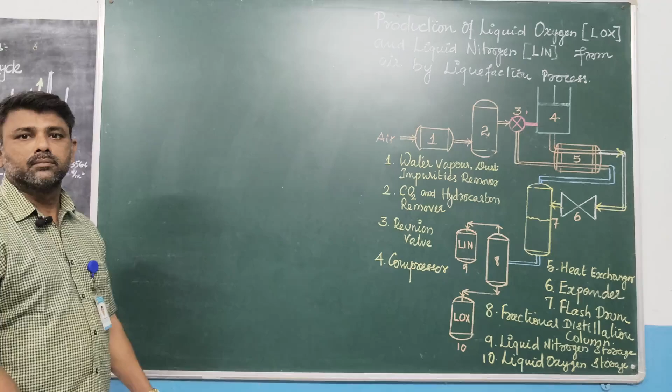Students, good morning. Today I am going to discuss about the definition, principles and application of liquefaction process.

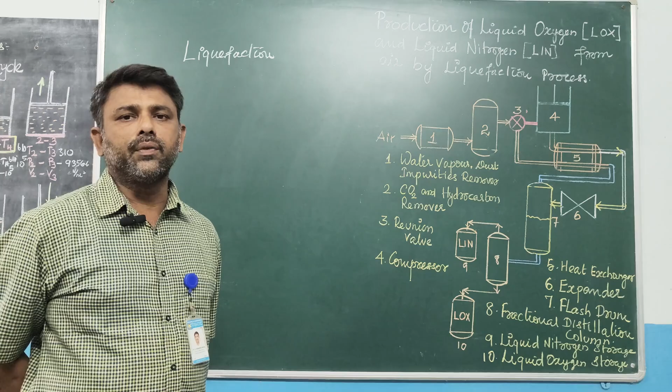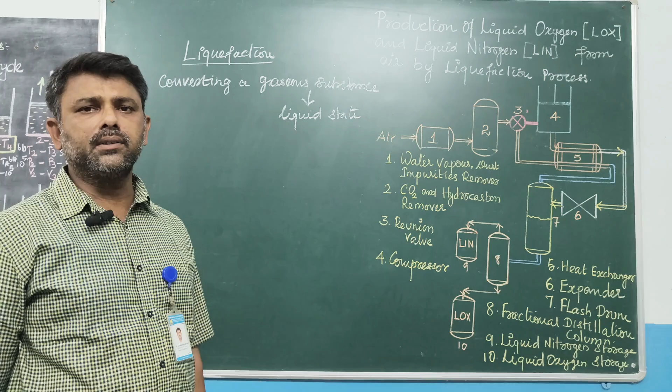Definition, principles and application of liquefaction process. Liquefaction process is a process of converting a gaseous substance into a liquid state.

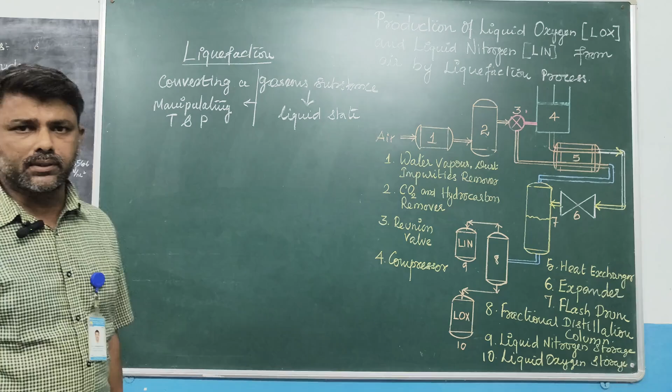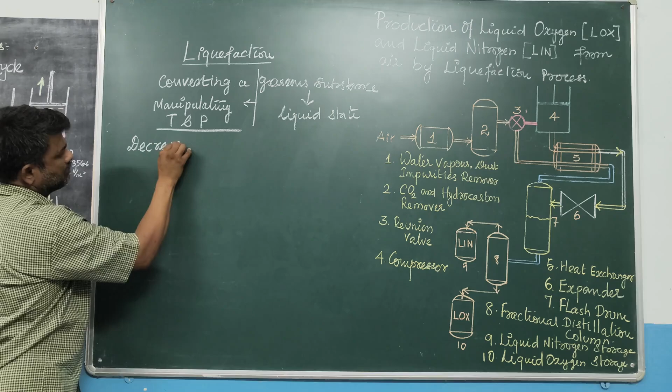This change of state is achieved by manipulating the temperature and pressure of the gaseous substance. Manipulating temperature and pressure means either by decreasing temperature, or by increasing pressure, or by means of both.

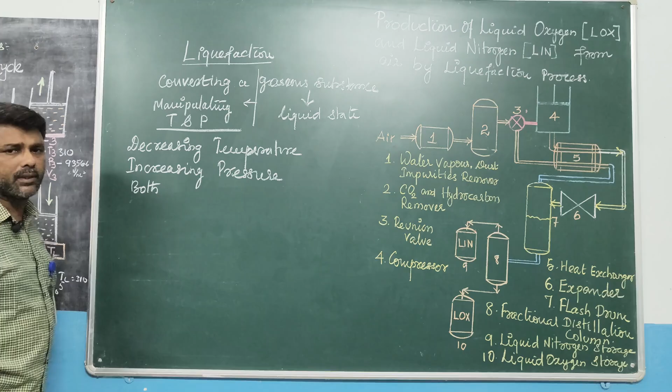In all the three cases, they tend to force the molecules of the gas or gaseous substance to come closer to each other. This leads to clumping of molecules.

It resulted in liquid formation.

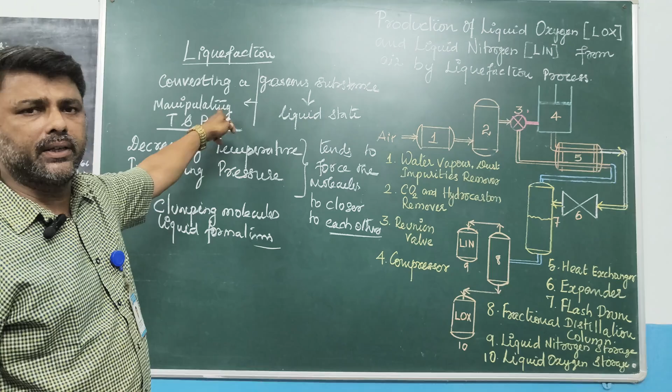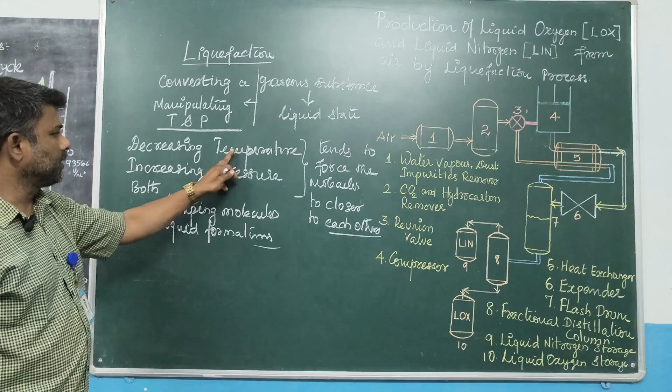So what is meant by liquefaction process? Liquefaction process is a process of converting a gaseous substance into a liquid state. The change of state is achieved by manipulating the temperature and pressure. Manipulating temperature and pressure means either by decreasing temperature or by increasing pressure or by means of both. This results in the gaseous molecules being forced closer to each other, leading to clumping of molecules and liquid formation.

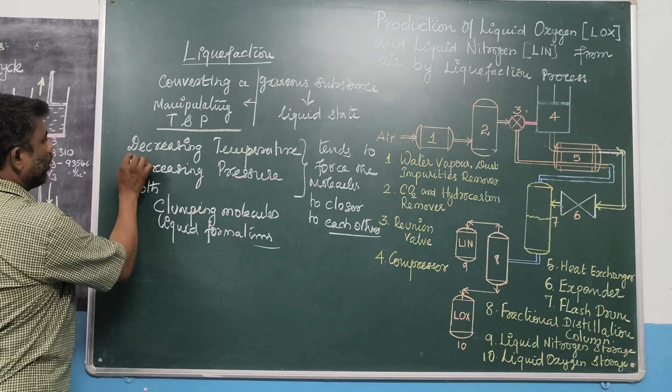Clear? Right. Let us see one by one. What is meant by decreasing temperature? While you decrease the temperature of gaseous molecules or increase the pressure, what will happen? In both cases, they slow down and reduce the kinetic energy of gaseous molecules.

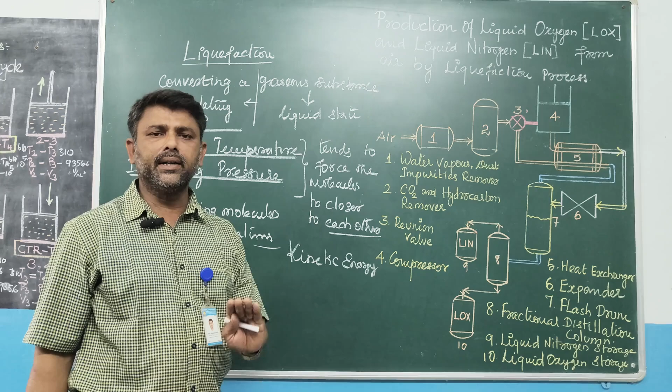Kinetic energy of gaseous molecules gets reduced. By decreasing the temperature or increasing the pressure, in both cases, the kinetic energy of molecules of the gaseous substance gets reduced. This reduction in kinetic energy in turn slows down the movement of molecules.

The slowdown process allows the intermolecular forces of attraction to overcome the intermolecular forces of repulsion.

Clear? You are going to decrease the temperature or increase the pressure. In both cases, first the kinetic energy of molecules gets reduced. This reduction in kinetic energy causes the movement of gaseous molecules to slow down. The slow movement allows the intermolecular forces of attraction to overcome the intermolecular forces of repulsion. This action leads to clumping of molecules and liquid formation is resulted. This is the principle behind the liquefaction process.

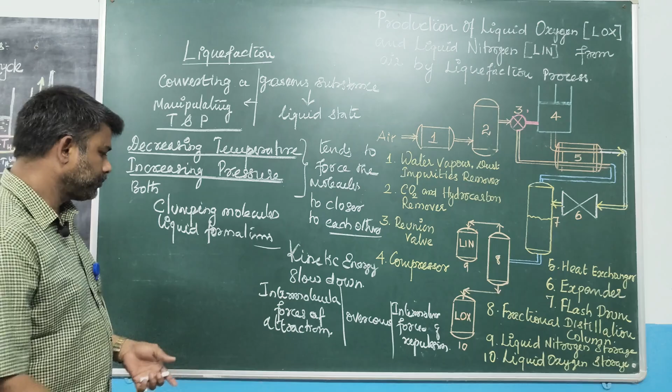Clear? Right, what next? Application of liquefaction process. One is the task of storage, handling and transportation. The task of storage, handling and transportation of gases is achieved.

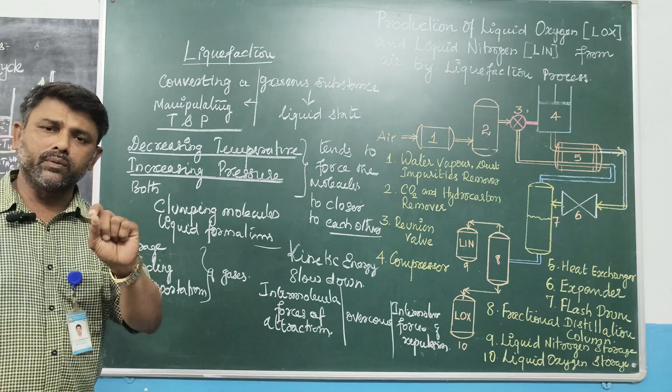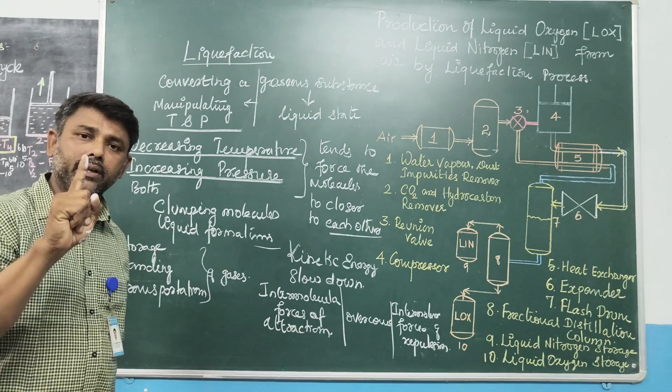Storage plays a vital role. In our home appliance, we have one LPG cylinder whose weight is 14 kg. The real-time volume of this 14 kg of liquefied petroleum gas, LPG, is 600 times greater than what you get in one cylinder. In real-time process, you would need a tanker lorry for the equivalent of a 14 kg cylinder. The volume gets decreased 600 times by means of liquefaction process.

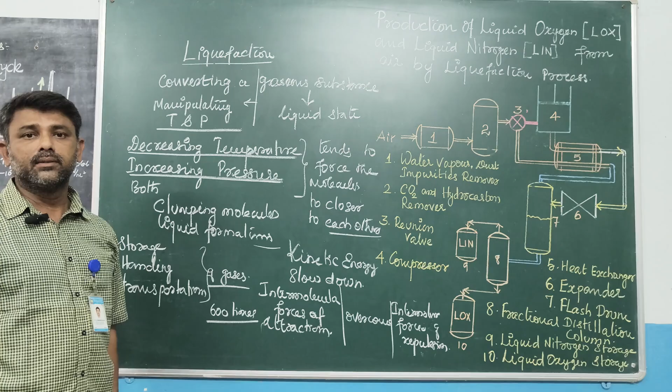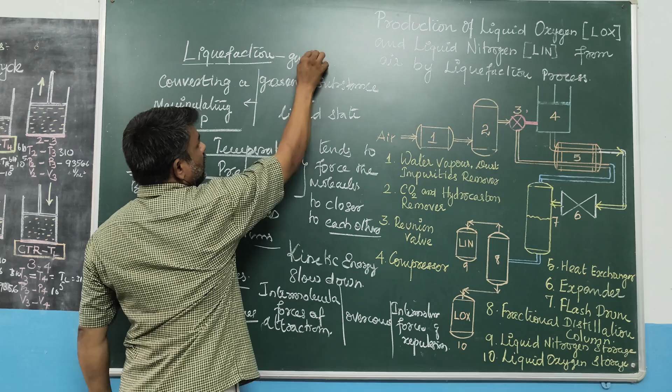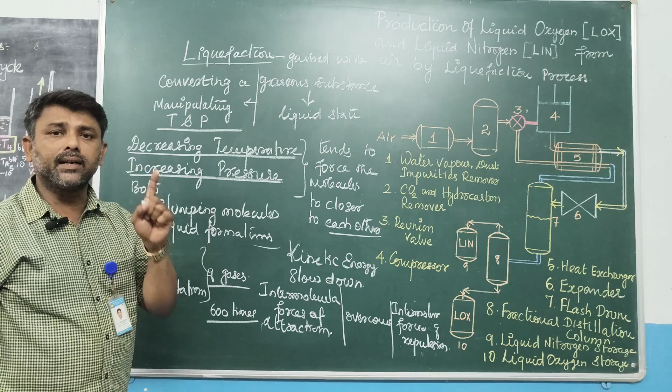Next, handling, somewhat difficult, and transportation. So the task of storage, handling and transportation of gases is achieved by liquefaction process. Hence, what I am trying to say is liquefaction process has gained wide acceptability in recent years because of the task of storage, handling and transportation of gases. 600 times the volume gets decreased through liquefaction process.

Apart from that, separation of a gaseous mixture into its component parts.

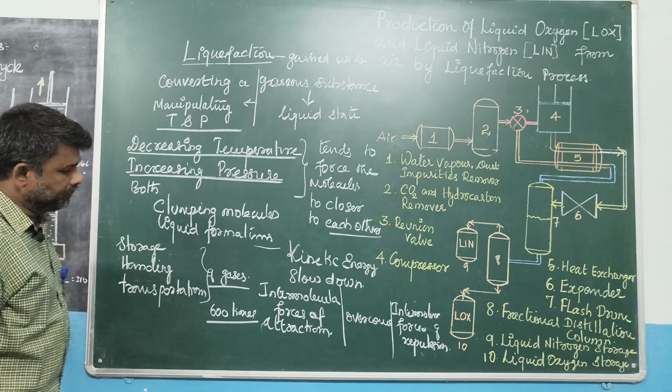Separation of gaseous mixture into its component parts by means of liquefaction process is achieved. For example, liquid oxygen and liquid nitrogen can be produced from air by the liquefaction process.

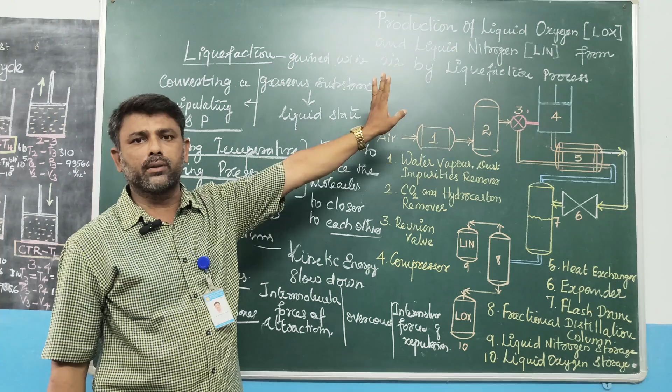This is the simple line diagram for production of liquid oxygen (LOX) and liquid nitrogen (LIN) from air by liquefaction process.

A simple process. Air is fed into a filter press in order to remove water vapor, dust, impurities, and inerts. Number one is a filter press, used to remove the water vapor, dust, impurities, and inerts.

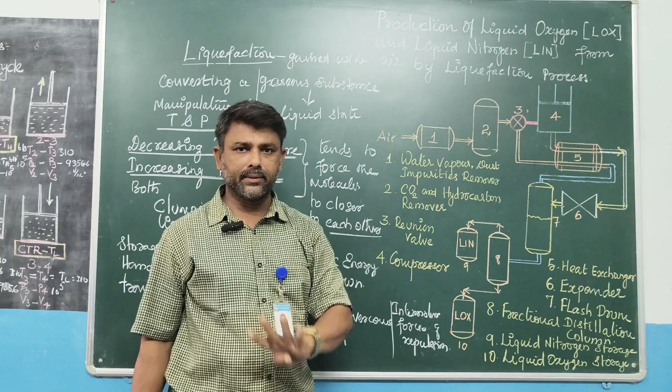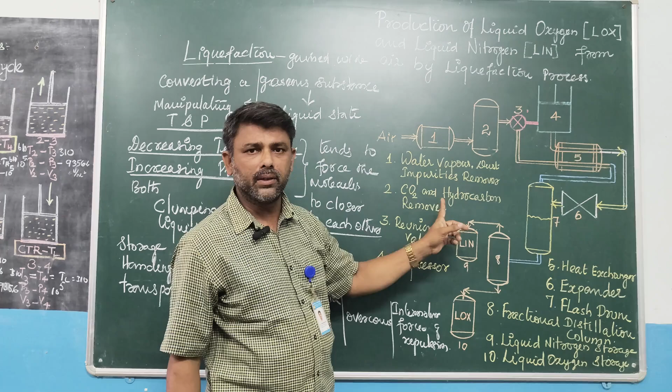Next is carbon dioxide removal. If any carbon dioxide or hydrocarbons are present, they must be removed from the air because they form a paste or stuck the process. Carbon dioxide and hydrocarbon, if present in the air, are removed in the second stage.

Carbon dioxide and hydrocarbon remover. Then fresh air is fed into a reunion valve, and from there into a compressor. In the compressor, the air gets compressed to about 200 atmospheric pressure, such a huge pressure increase.

Due to increase in pressure, the pressure is increased by decreasing the volume of air. Decrease in volume causes an increase in the temperature of air. Hence, the compressed air is fed into a high pressure tube.

Number 5 is the heat exchanger, a regenerative double pipe heat exchanger with a high pressure tube and a low pressure tube. The compressed air is fed into the heat exchanger where the temperature of the air is reduced to near room temperature.

From the heat exchanger, the compressed air is fed into an expansion valve. In the expansion valve, the first section is convergent, where the air experiences a still increase in pressure.

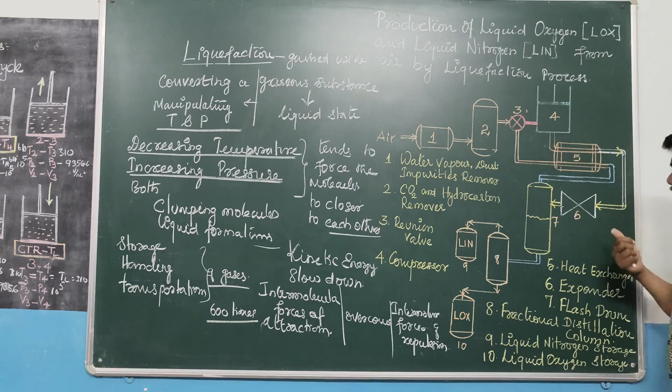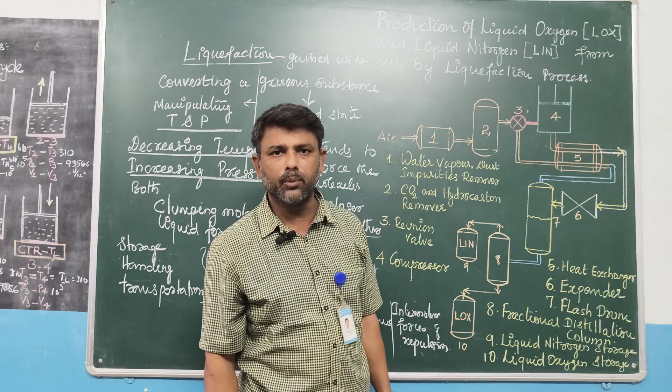Once it enters the throttle area, all of a sudden the air gets expanded. This sudden expansion causes the temperature of the air to decrease to near or below its critical temperature. This is the expansion area, where all of a sudden the air gets expanded.

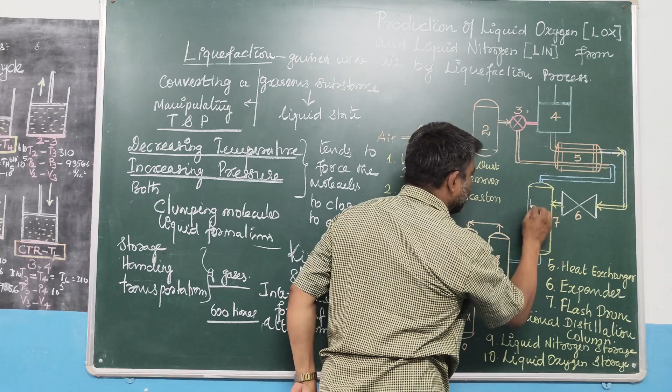Due to expansion, there is formation of liquid. The expansion causes the temperature to decrease to a great extent, hence the air gets liquefied. Hereafter, this is a two-phase region: one is liquefied air, the other is unliquefied air.

The unliquefied air, with low temperature, is again fed back to the low pressure tube side in the heat exchanger. Here, the temperature of the compressed air gets further cooling, called pre-cooling. After the pre-cooling process is over, the low temperature air is reunited with fresh air, and the mixed makeup air

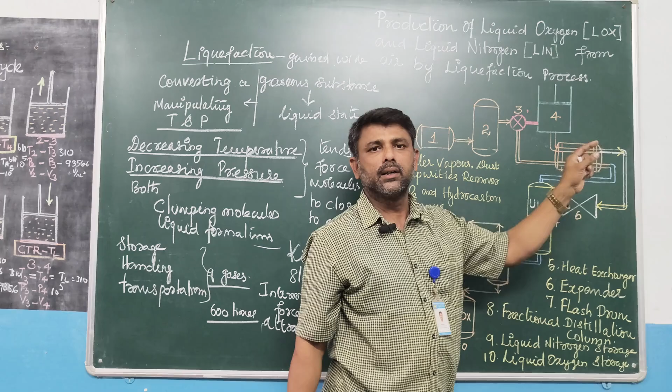is again fed into the compressor. Compression, cooling, expansion, repeated in cycles, causes production of liquid nitrogen and liquid oxygen.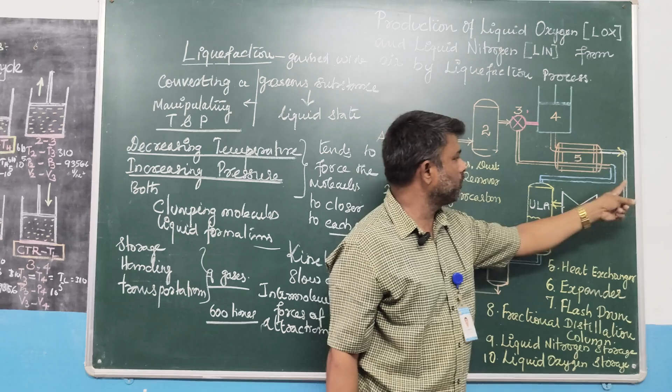This is the flash drum, used to separate the unliquefied air and the liquefied air. The unliquefied air is fed back to the low pressure tube side, while the liquefied air is sent to

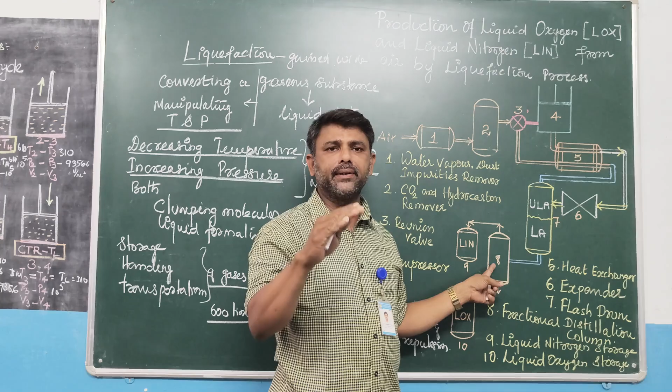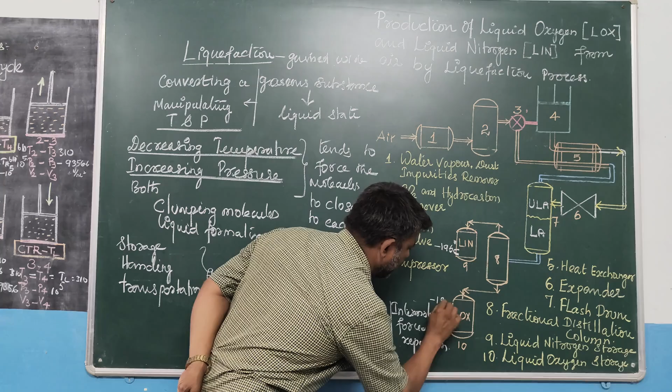a fractional distillation column. In the fractional distillation column, the temperature is maintained suitably. Liquid nitrogen has a temperature of minus 196 degrees Celsius, and liquid oxygen has a temperature of minus 183 degrees Celsius. Due to this difference in temperature, separation is achieved by using a fractional distillation column. This is a simple process.

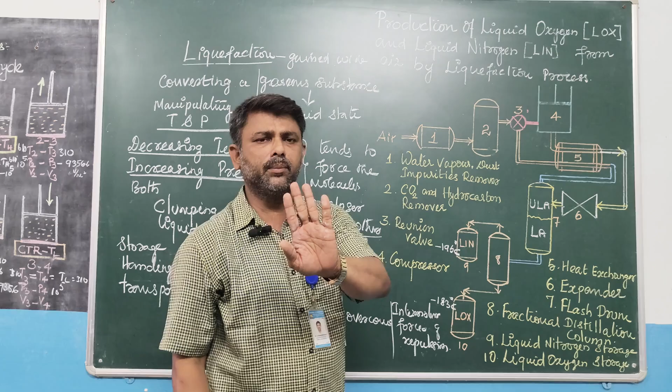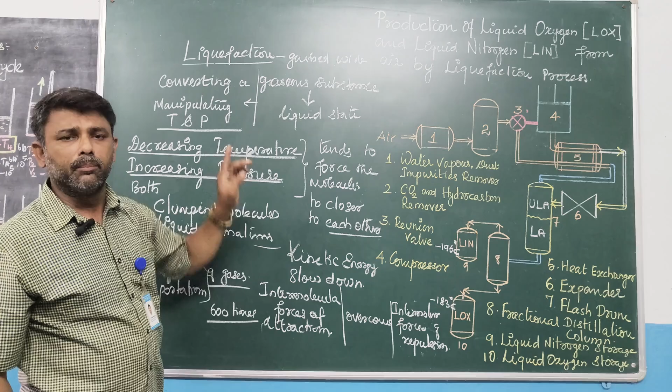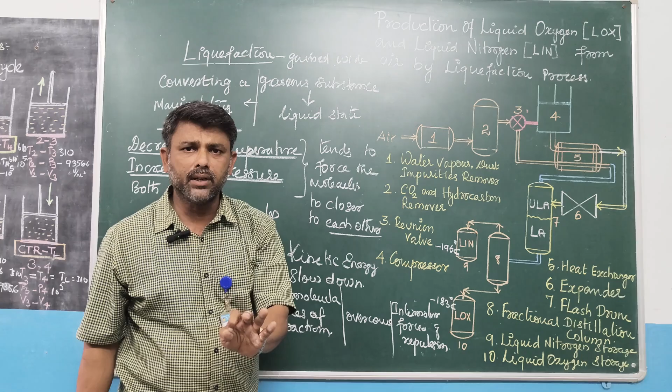So what I am trying to say is, apart from the task of storage, handling and transportation of gases, the liquefaction process has gained wide acceptability in recent years because separation of a gaseous mixture into its component parts is achieved by means of liquefaction process.

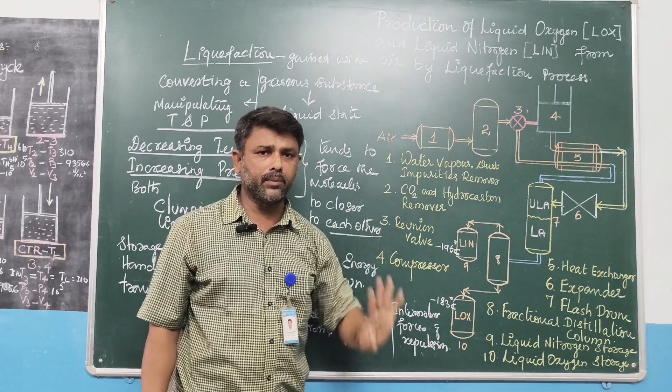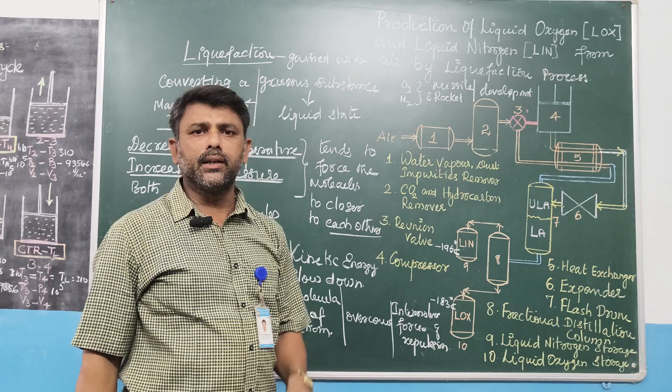This is a simple example: separation of oxygen and nitrogen from air by liquefaction process. Production of liquid oxygen and production of liquid nitrogen are both highly useful in missile and rocket development, as well as low temperature refrigeration.

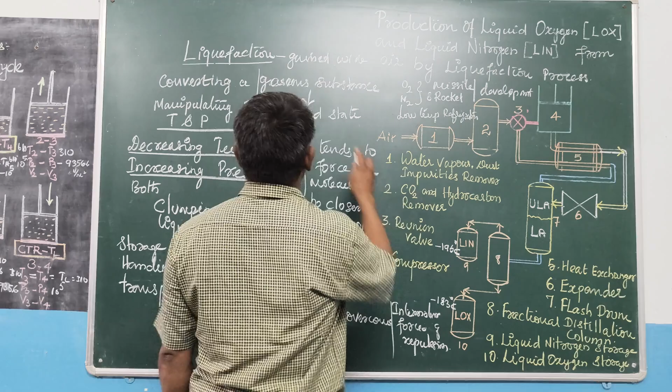Okay, what next? Production of liquid helium. Liquid helium is widely useful in space research, widely applicable in space research.

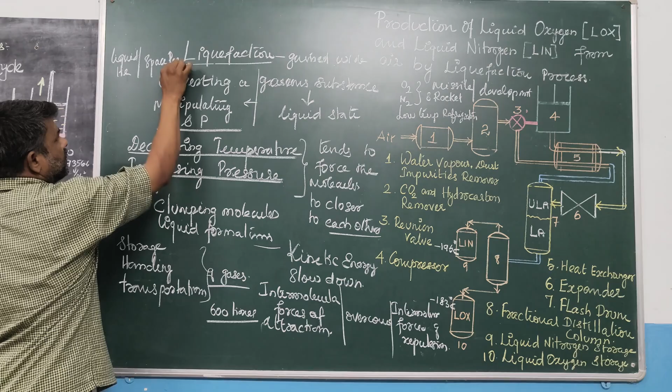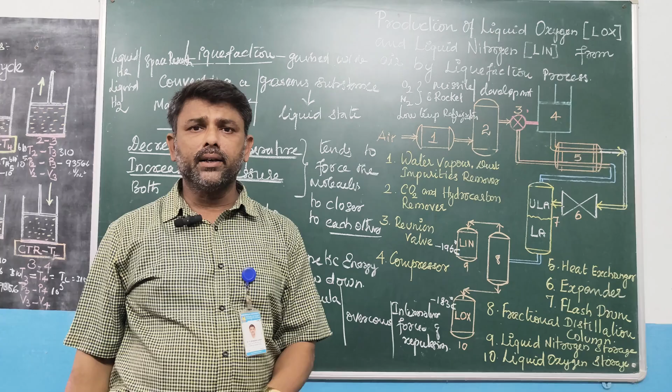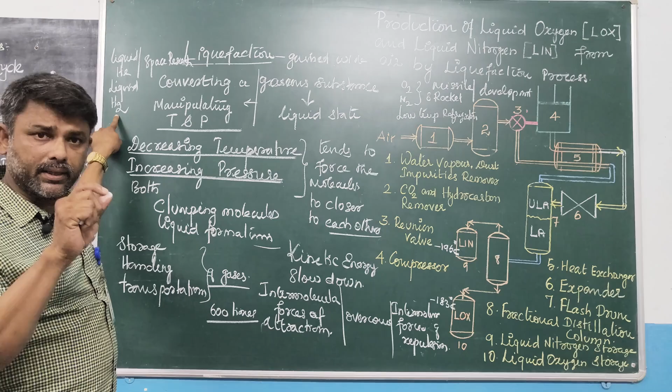Production of liquid hydrogen. This is used in missiles as well as nuclear weapons and rocket propulsion. Liquid hydrogen is widely used in nuclear weapons as well as rocket propulsion. So the liquefaction process is much more important. This knowledge should be very much essential for chemical engineers like you. Thank you.